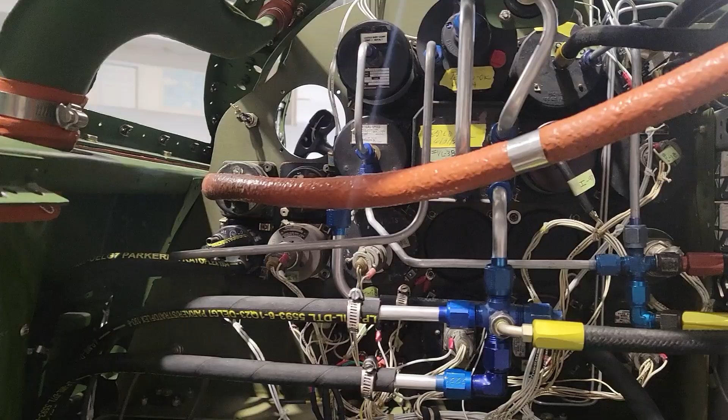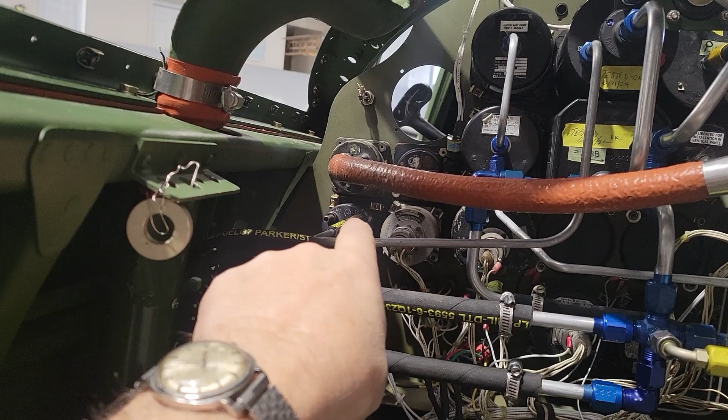Hey, it's Bob. We're again working on the plumbing nightmare, but we're kind of closing in on some things. Let me turn this around. Okay, so we found some issues of understanding that we didn't understand. The vacuum gauge, which is right there, and if you look close, we now have an open port there. Well, one side says low, which is that side. The other side says high. So one side is vacuum, but the other side is actually pressure.

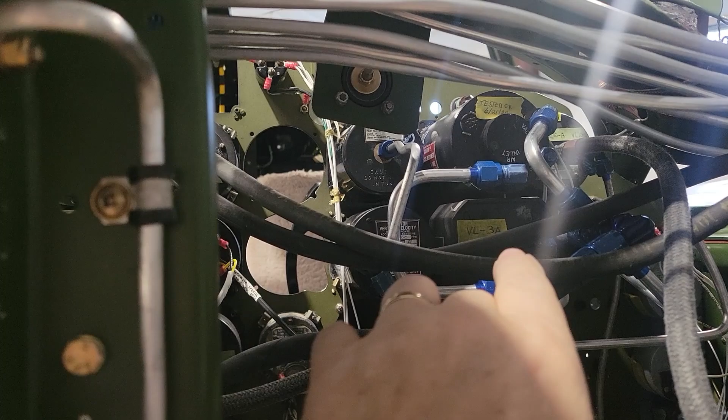So that would come into play if we still had de-icer boots and any other vacuum stuff going on. The only thing we're using vacuum in this airplane for is the attitude indicator and the vacuum compass. On the other side, we do have those same two instruments, but we also have the VSI, which is operated off the vacuum. The reason why we don't have it on this side is because it's electrically operated. So anyway, we're going to test it here in a minute, and we'll get back to you.

So I'm sitting here in the cockpit, and we've gone through several iterations of testing. We're bypassing check valves. We have two electric pumps in the nose, and we built a system that we should be able to turn them on independently, closing off the one that's not being in use. We're not developing enough vacuum. Jan's switching the piping a little bit, so we're going to be working off of the other pump, and we're going to give it a try. Now we can hear stuff coming on, but not what we want, so stand by.

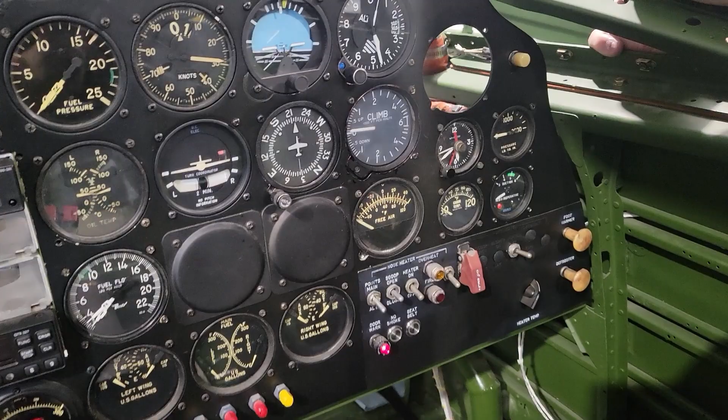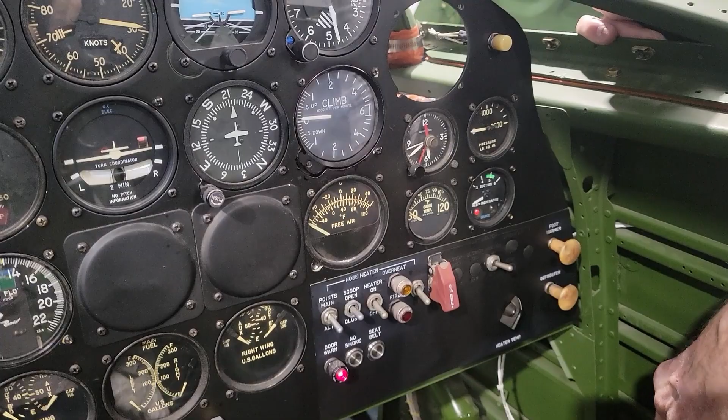All right, so we're going to turn the batteries back on, which is right here. That gives us power on the dash. Jan's going to flip on the vacuum pump, and we're going to see what goes on here. Okay, there's the vacuum pump, and again, we're getting a loss in pressure. The red ball comes on. Comes off. Shuts off, yeah, what Jan said. But we're not getting anything on any of it. So our attitude indicator, we got a little bit of movement there, but anyway, that's vacuum.

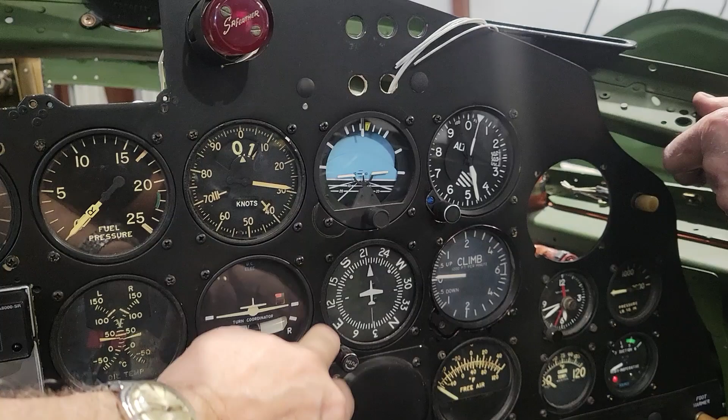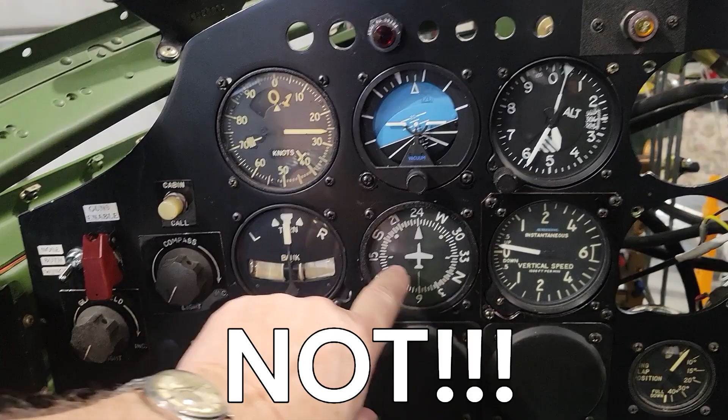The vacuum compass on this side. The VSI on this side is electric. I've got the circuit breaker pulled on that. So the artificial horizon, vacuum compass, and the VSI on that side. So there's 5 instruments being powered, not including the vacuum gauge. So we're going to continue investigating here and find out why we can't develop enough vacuum to power these instruments. Stand by.

Okay, so we've been struggling with the vacuum system. We were trying to do things differently. The instrument layout caused some grief for us. We're not using the engine-driven vacuum pumps, which put out a lot of flow. So vacuum is a component in these aircraft vacuum systems, but the volume of air that they move is important for the instrumentation. And so the plumbing that looked so great before is not going to work for us.

What we were trying to do, we've got 5 instruments plus a gauge that we were trying to have one of our electric pumps power, and then we'd have a backup pump. You know, you can switch back and forth and have all the vacuum system work. Unfortunately, the pumps that we have, they're aircraft vacuum pumps that are electric, and so we've got a couple of ways to do this. Either we can have both pumps run and do a co-pilot side and a pilot side, or we can still have our idea of having a vacuum system for one side and an electric instrument system for the other side.

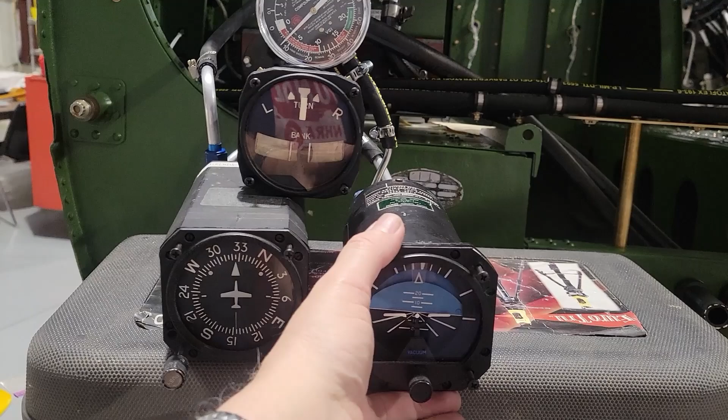Okay, this is really noisy by the pumps, but hang on. So our artificial horizon is doing what it should. Our turn and bank and our compass are doing what they should.

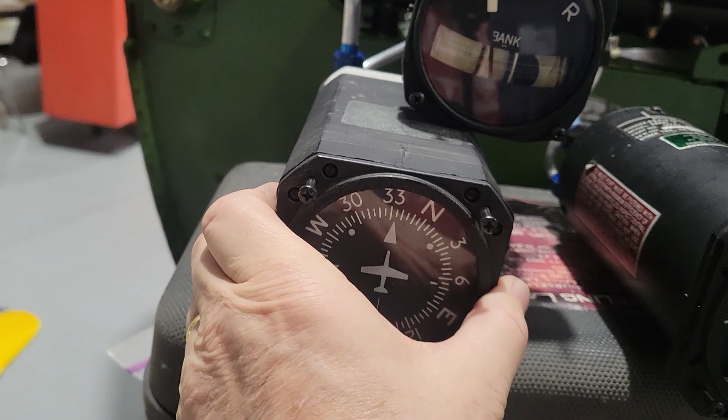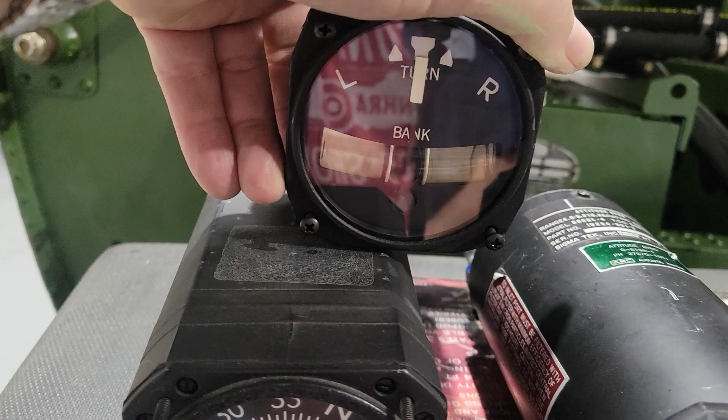This ball in here, this is gravity, and so I'm not quite level, but in flight, what they would say, you step on the ball. So this is on this side a little bit. You would step on the rudders to straighten that out.

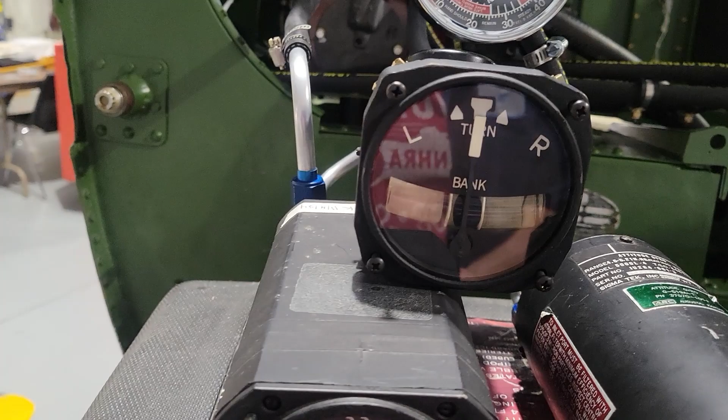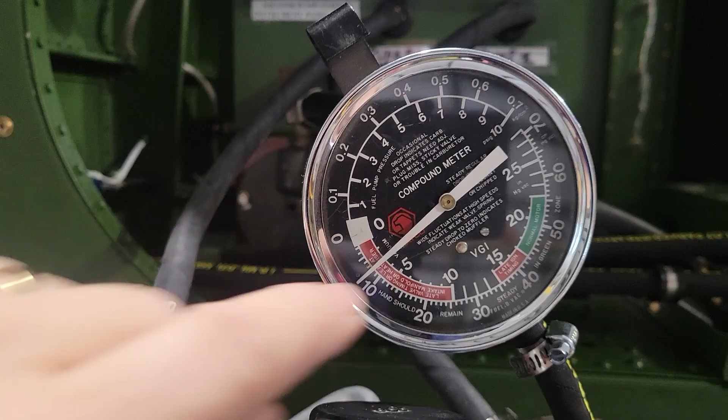The only downside that I've got going right now, besides the noise, we should be reading over 4 inches of mercury, and we're just about 3. We're going to do some more experimenting, and I'll be back.

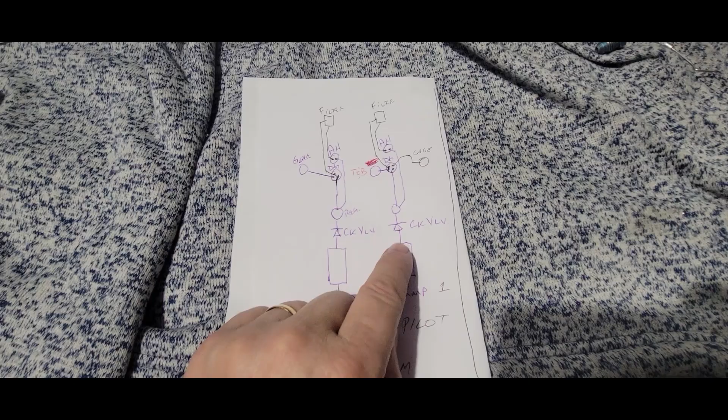Okay, here's what I've drawn out of what we have to do. First of all, this is updated from what we were originally trying to do. Originally, we were trying to have both pumps talk to the whole airplane. So these are check valves. Here's your pumps. Would have come out of here and come over to here, gone up to the aircraft, and then feed all of this.

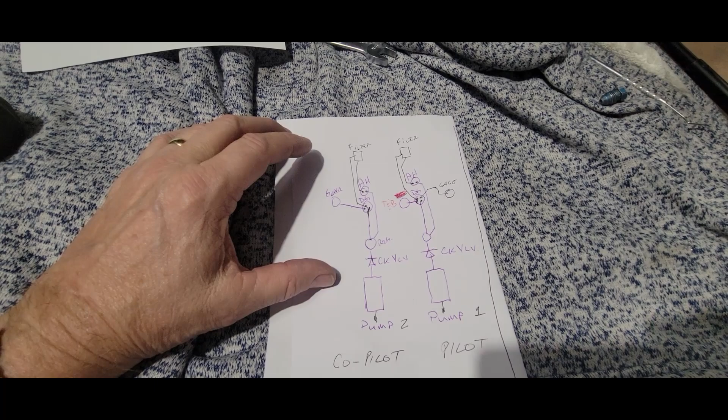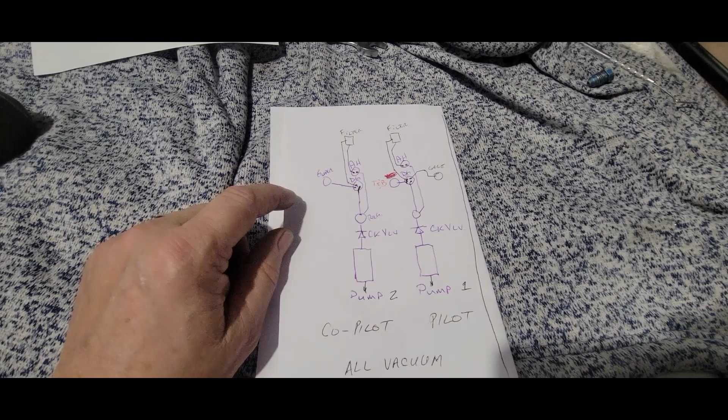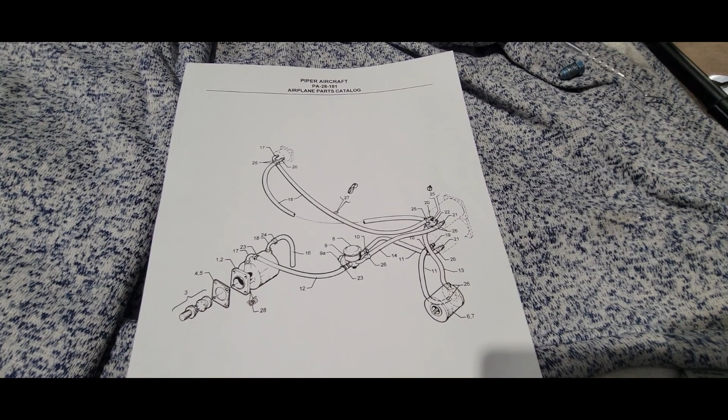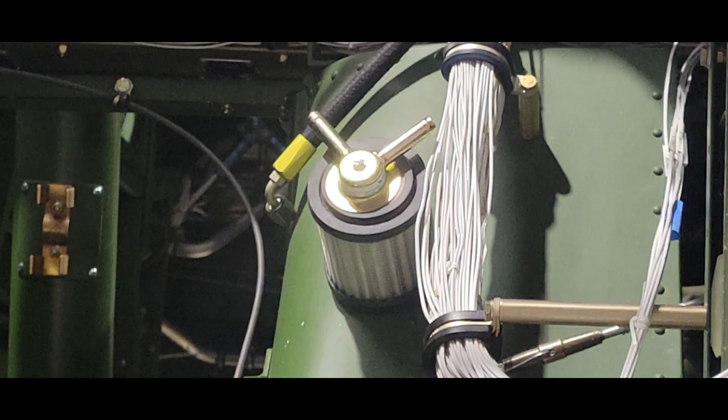Well, it's pretty apparent that our requirement for flow is not going to match what we need. So this is an alternative. We run a pump to the co-pilot side, run a pump to the pilot side. We hit the vacuum regulator, which has 2 ports on it, and this is a Piper drawing here out of their book. So here's the air inlet. This is the filter. This is filtered air, like we have up there. It's a really pretty thing too.

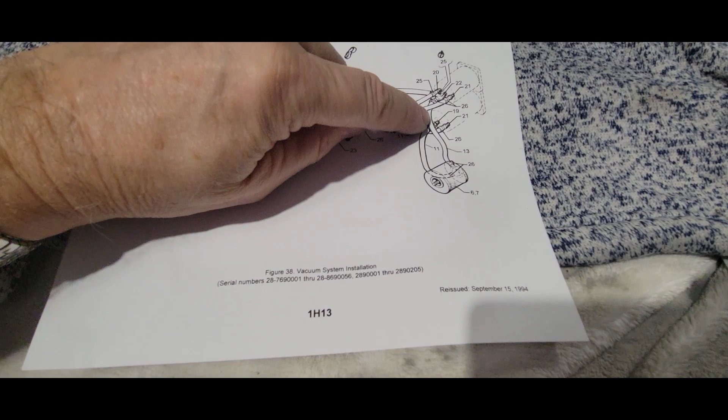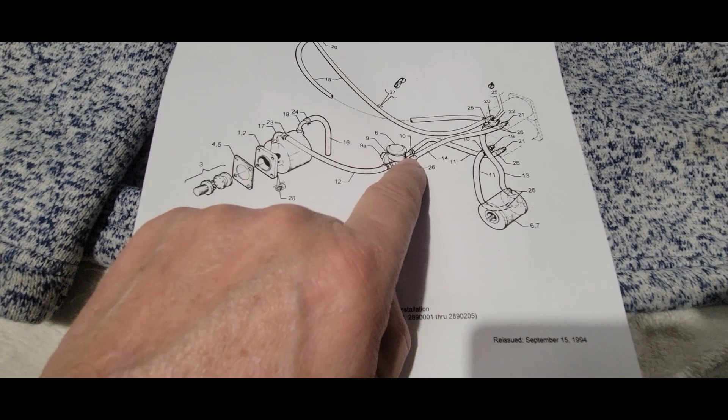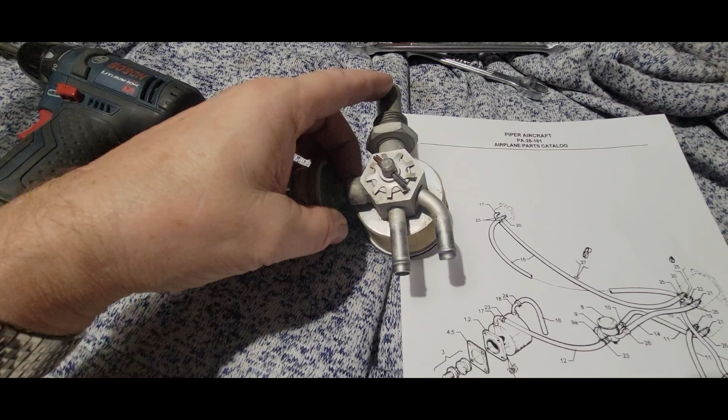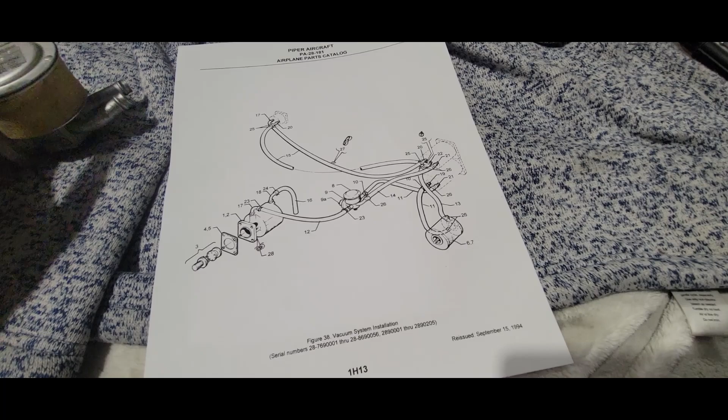So your filtered air comes in, and one of those hoses will go to one instrument, the other hose will go to the other instrument. All right. The regulator valve also has 2 hoses on it. It looks like, here's an older vacuum regulator valve. So here is your vacuum side, and here is where you come from your instruments. That's that right there. Exactly. So one hose would go to one instrument, another hose would go to another instrument.

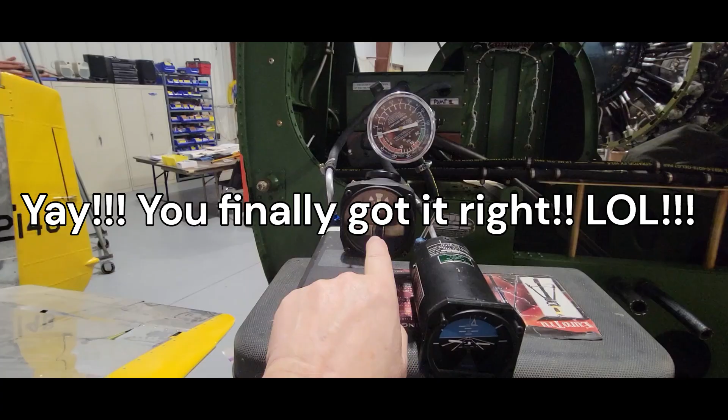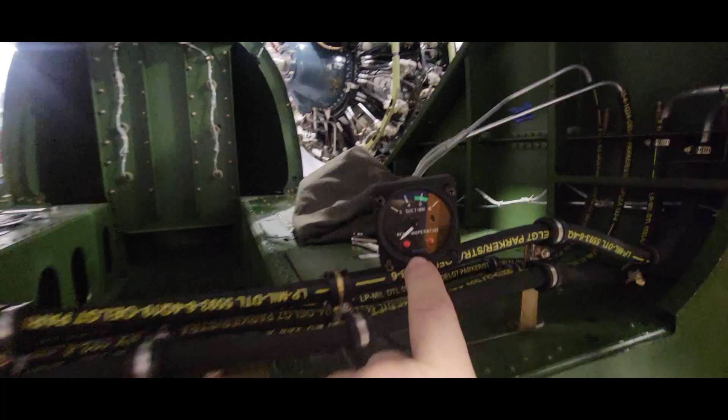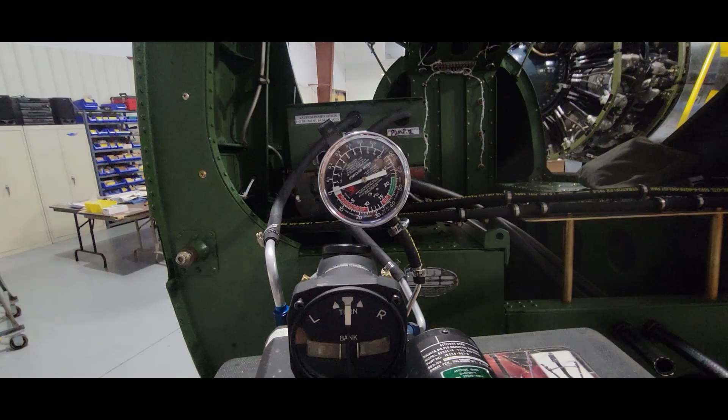What's not depicted here is a turn and bank instrument that we have here. And then we also have the gauge. We're just using a regular vacuum gauge. I don't have enough reach. I have this plugged in. You see these red dots here? Those are hooked to each pump, and we'll know which pump is on and that they are working when the red dot extinguishes. But I couldn't get that over here with what I had available, so that's why we're using this, so we can keep track of the pressure. I mean the vacuum.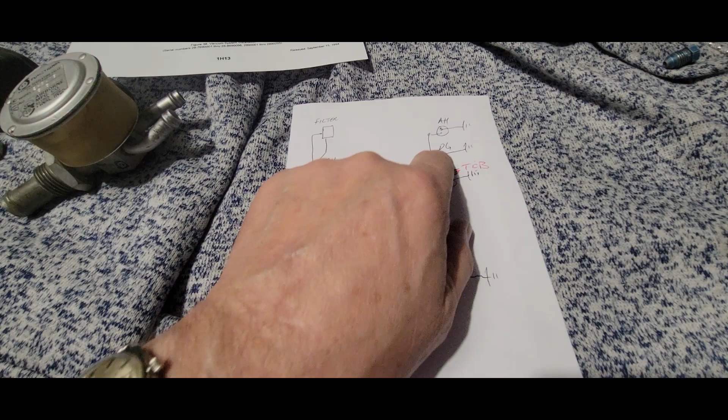All right, so this is one way to do it. The other way, and we're still talking about it, is to keep the two pumps. Now we've got a backup for this vacuum system, but then convert the pilot side over to electric. That means buying new instruments or acquiring instruments, but that may be the best way to go for our purposes. It provides some redundancy from the vacuum system, which are not always as reliable as you'd like them to be. And so we'll see how this goes. I think that's going to be a next week thing.

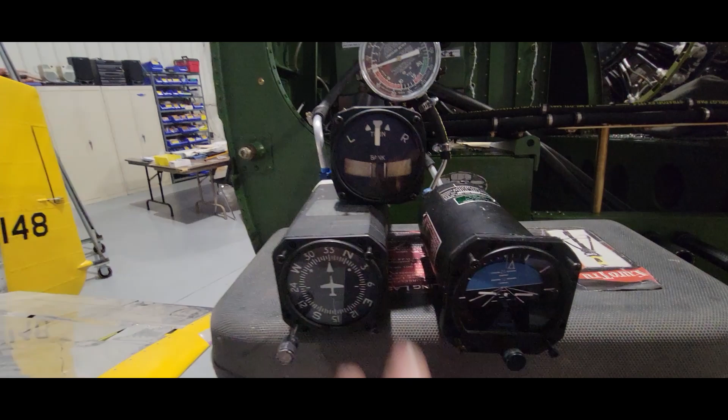We'll see if there's anything else that goes on today. The test on the instruments could have been better. I think that regulator valve is not very good. I had this one in a little bit ago. It seemed to provide a little more vacuum. I could get the gauge up to almost 5, and all the instruments were operational. But I'm running out of time today, so this may be a Monday thing.